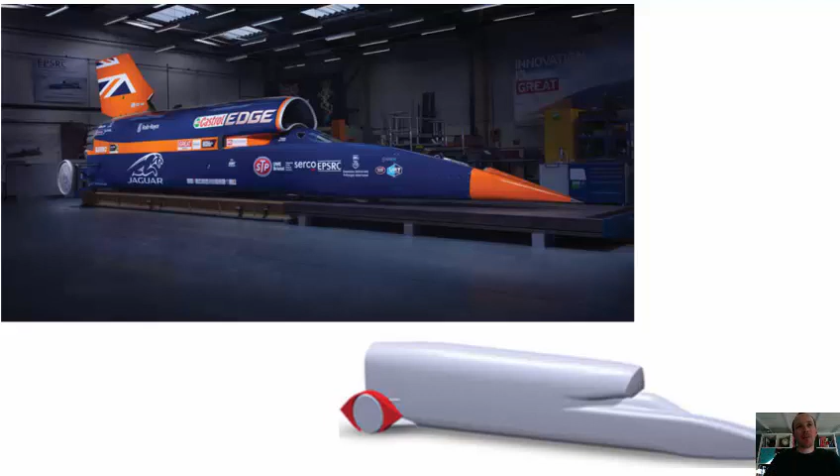So the problem statement that we started off with was basically, given that the main body of the Bloodhound vehicle had been fixed, and in fact at the point of doing this work was already in construction, we were then set the task of trying to find an optimum design for the fairing that wraps around the rear wheel of the car, which you can see in the lower figure here is the red part wrapping around that rear wheel on a parametric model that was used for this study.

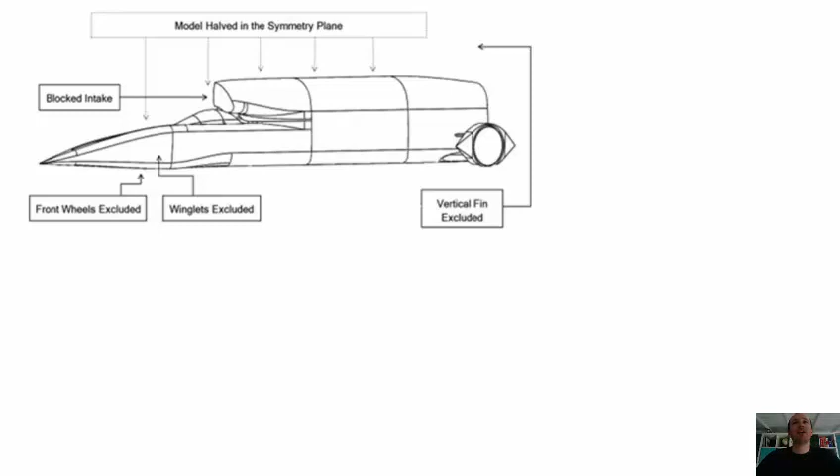So the first part of the project was really to find a sensible parameterization of the space and a simplification of the geometry to allow us quick turnaround times of the CFD aerodynamic simulation model. To do this, we blocked off the intakes of the car, got rid of some of the features that we didn't think were important in this study, like the presence of the front wheels and the fin, and we chopped the car down the middle, down the symmetry plane, again just to try and reduce the computational time of running CFD simulations so that we could turn around as many CFD simulations as possible.

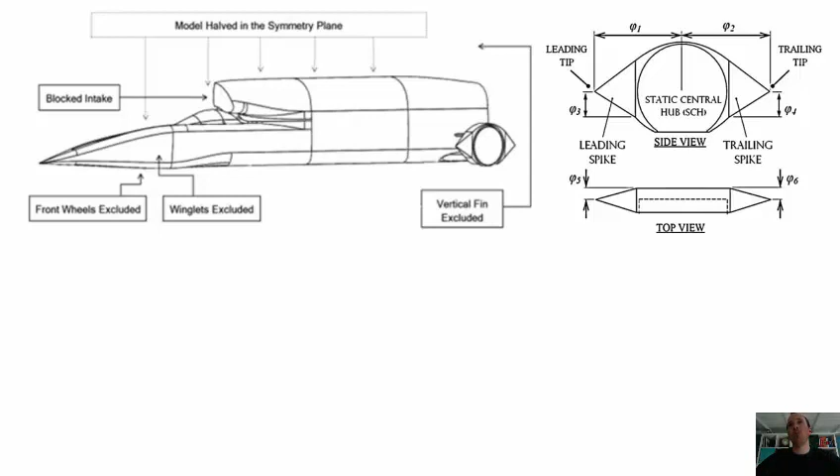We then looked at a sensible parameterization of this rear wheel fairing shape. We decided that the central section of the fairing would actually be fixed, and we refer to this in the paper as the static central hub. And then 6 parameters were used to define essentially the positions of the leading and trailing spikes that form the fairing geometry.

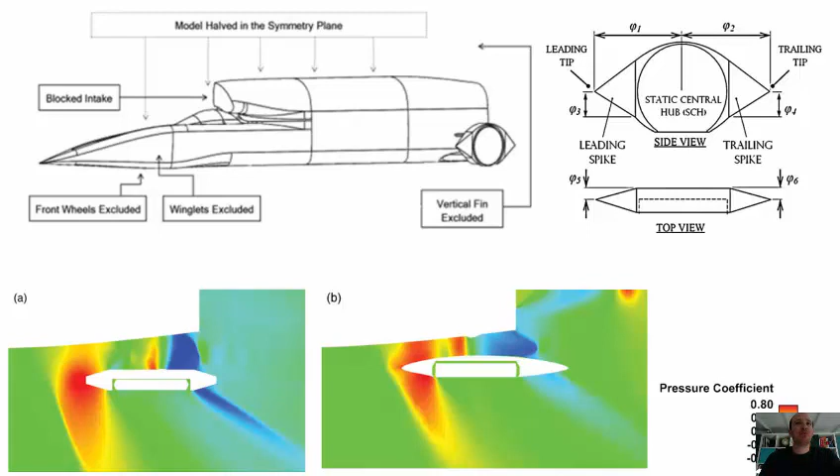The first check that we did was to make sure that this parameterized, simplified model of the car and the fairing still produced sensible aerodynamic performance in comparison with the full fidelity CFD model, that we were capturing a sufficient resolution of the physics to be able to assume that any improvements to the design of the parametric model would translate back to a full fidelity model.

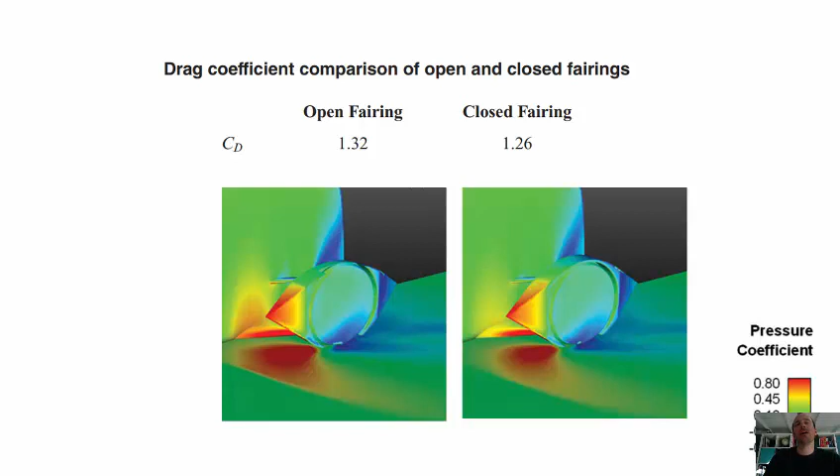And following this, we then explored, ahead of the optimization study, a comparison of running with an open fairing and a closed fairing. So the open fairing was a slightly smaller fairing in terms of frontal area, but had the top of the wheel actually exposed to the airflow. So even though this fairing had a smaller frontal area, it turned out that because of that exposed wheel rotating into the airflow, the drag coefficient of the open fairing was higher than the closed fairing. So the closed fairing was used as the baseline for the remainder of the optimization study.

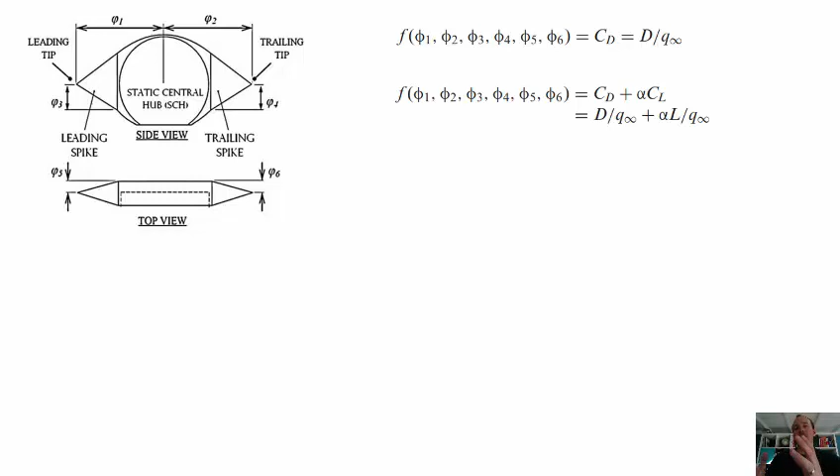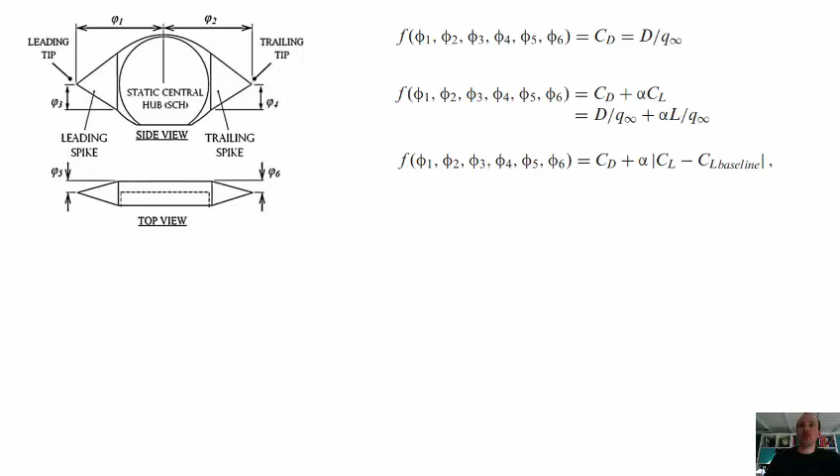In the paper we look at the output for various objective functions. The main one I'll talk about in this video is optimizing for simply drag minimization, taking no other things into consideration. But we also considered an optimum fairing design for drag and lift minimization, where an alpha parameter was used to determine to what extent lift minimization drives the optimization process, and a lift constrained drag optimization case where we were trying to minimize drag whilst also minimizing the variation or the change in lift from the baseline lift that was being generated by the vehicle.

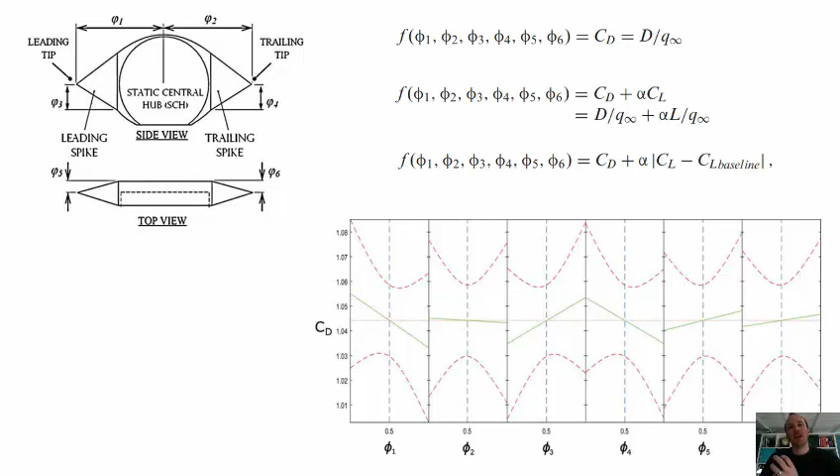We sampled the 6-dimensional design space using 60 design points, which was computationally about as much as we could fit into the time frame we had for the project, using Latin hypercube sampling and then a response surface fitting technique to try and get a feel for the input parameter responses, so how those design parameters phi1 to phi6 ultimately drive the output objective function, in this case here drag coefficient. Having done this, it became quickly clear that this kind of quite simple design of experiments, response surface approach to doing the optimization wasn't going to be sufficiently trustworthy because the error bars on those response surfaces were too large.

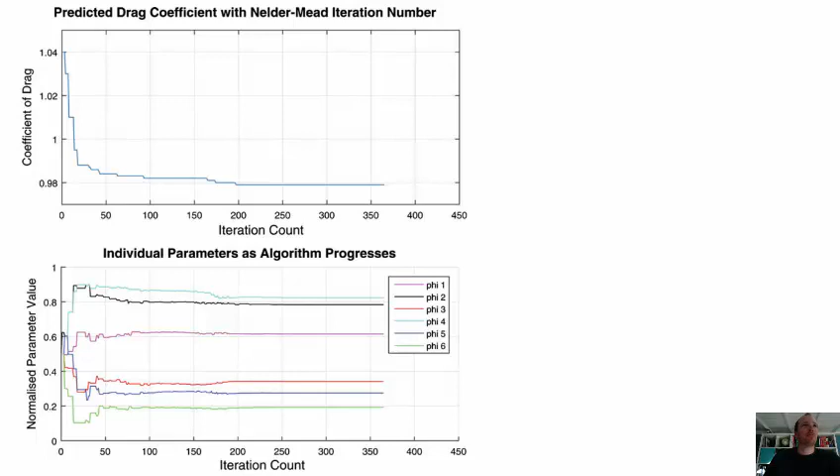So we moved on to use a Nelder-Mead optimization procedure based on radial basis function interpolation of the design space from those 60 samples, and got responses like this. So in this case, this is the result that's shown in the paper for simply drag minimization. So starting with this baseline fairing design which had a drag coefficient of about 1.04, the optimizer managed to reduce the drag on the fairing down to under 0.98, which is a 6% reduction, which in terms of overall car performance is significant, because a third of the overall drag of the car at high speed comes from the rear wheel fairings, or the rear wheel and suspension system.

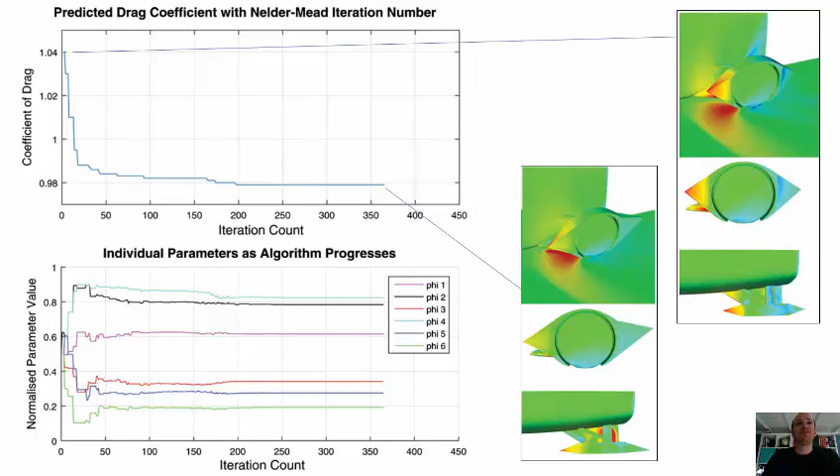For more details, obviously refer to the paper published back in June 2016 in the Royal Aeronautical Journal.